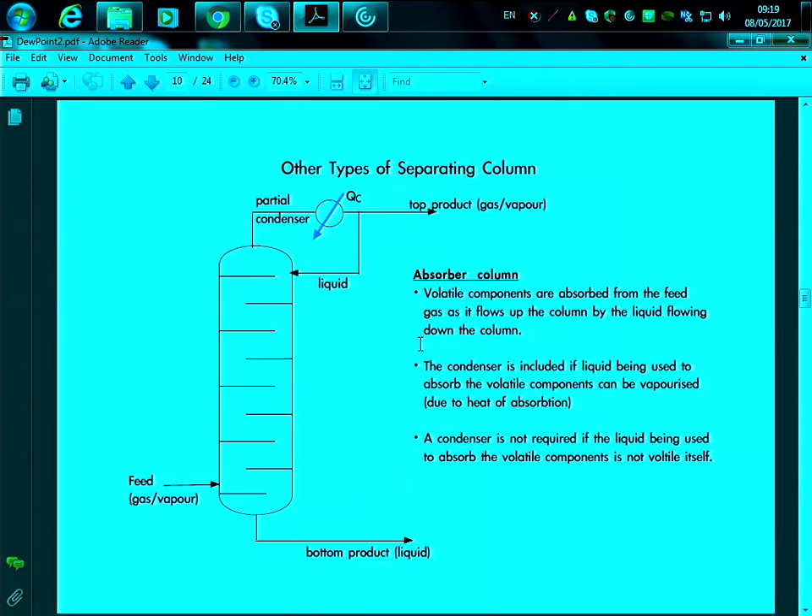Now, another type of distillation column is the one where we have a condenser, but we don't have a reboiler. And this is called an absorber column. Okay? So normally in these types of columns we have the opposite. Volatile components are absorbed from the feed gas as it flows up the column, and the liquid flows down the column. So here you can see the feed is at the bottom, and this will normally be in gas and vapor, and then the gas will go up, and then we will condense the gas and reflux the liquid down. Okay, so in these columns we can show that we have a gas and a liquid product going out of it.

Now, overall, the design of a separation column. So what does a distillation column mean? So basically it's essentially a tube where we allow gas-liquid contact. Okay, so it's a tube with a number of plates to allow gas-liquid contact, and therefore, by doing that, we allow mass transfer and heat transfer between the two streams. Normally, the diameter of the tube is determined using fluid flow characteristics. So here is going a little bit into the hydrodynamics of the distillation column, and we will not go into that detail.

There's something very important as well to consider, which is the maximum gas-liquid flow rate, and that will determine the diameter of the plate column. So what does that mean? Well, we need to use a flow rate that is high enough so that the gas basically goes up and disseminates through the liquid. However, the liquid must be in contact with the gas a reasonable time period that allows the sufficient mass and heat transfer that we want. And that will basically determine the length of the plate by itself.

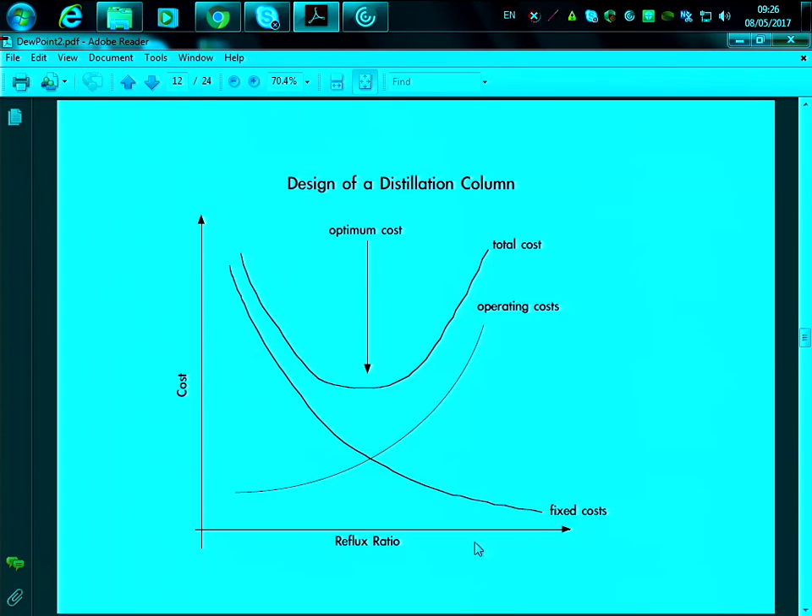So let's have a look at an example, in order to now go into the design of the distillation column, okay? So the only thing that we are going to calculate to design the distillation column is the number of plates. And why? Because if you remember last Friday when we were in HYSYS, we normally need to input in HYSYS the number of plates. Sometimes it's a parameter that is useful to estimate for simulation. So that's why we're going to concentrate on that, but not on the other characteristics that would require a lot of time to discuss and even a whole module.

So we're going to use the McCabe-Thiele model, okay, which is a type of model that is used in order to estimate the number of plates. There are different types of models, but that's one of the simplest models used for binary mixtures, and that's what we are going to learn today.

So this model will be based on a plot of the mole fraction in the vapor and liquid equilibrium. So if you remember last Friday, I said that one of the assumptions, for example, when we designed compressors, okay? So what was the assumption that we made for designing compressors? Isentropic compression, okay? So that facilitates our calculations. Here in separation for distillation columns, the assumption that is made is that in each plate, the liquid and vapor are in equilibrium, okay?

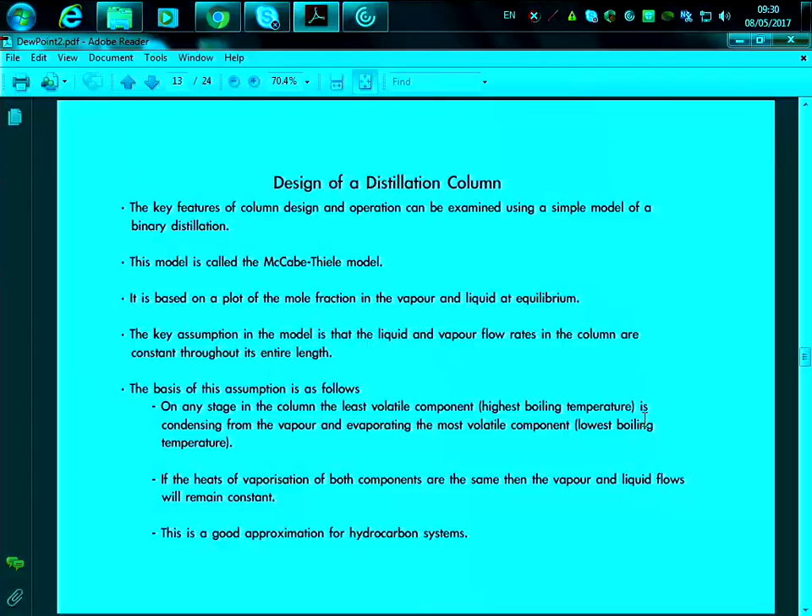So now you will see how we're going to do this approximation using this type of model. Okay, so right now look at the methodology that we're going to follow. Just check the methodology, and once you get the methodology, basically that's how it is applied to any other case. So we are going to look in this case at the benzene toluene mixture, which is at atmospheric pressure. And this is very similar to the case that you have for your assignment, where you have two compounds as well.

So here what we have is the TXY diagram of this mixture, where we have the mole fraction of benzene at different temperatures. So again, here we have the liquid vapor equilibrium curve, and then we'll have the vapor phase on this side, the liquid phase on the other side. Let's say if we had a mole fraction of benzene of 0.3, at equilibrium the liquid will be 0.3 of benzene and the vapor will be 0.5 of benzene at which temperature? 98? Around 98 degrees Celsius. Okay, so at 98 degrees Celsius, 0.3 moles of benzene in the liquid phase are in equilibrium with 0.5 moles of benzene in the vapor phase.

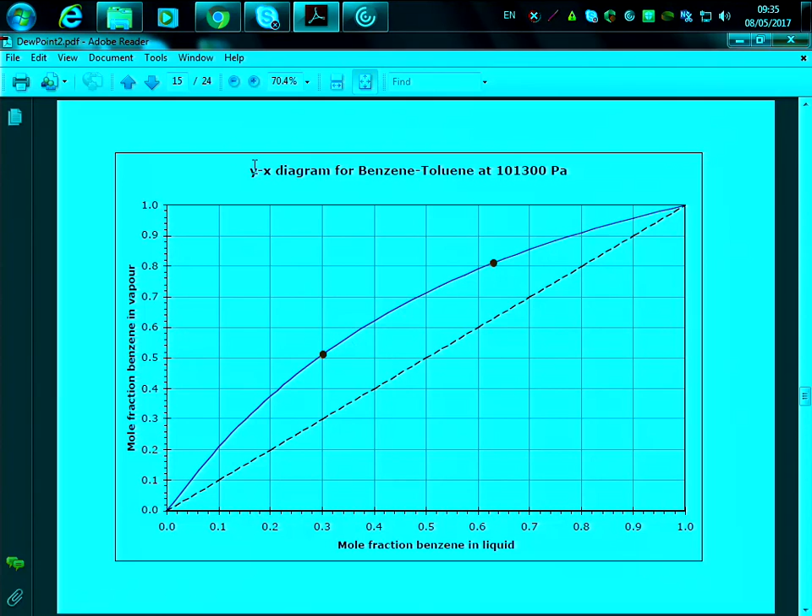Let's have a look at the example. So the example, we have a distillation column with a reboiler, okay? And in the distillation column, we have the feed.

200 moles per second, which is the flow rate of a liquid feed containing 40% benzene, 60% toluene, is to be stripped to give a toluene containing 2% mole benzene as a bottom product. Okay? So here we have the bottom product B, which is 2% mole benzene.

Will that be liquid or vapor at the bottom? Liquid. Okay, so we're taking out from the reboiler, but in your assignment, you're taking up from the top of the reboiler, the vapor. But in this case, we're taking from the bottom of the reboiler, so therefore we're taking up the liquid fraction.

So we have the bottom product that has to be 2% benzene, and the top product D, 56% mole benzene. So the vapor leaving the reboiler is in equilibrium with the liquid in the reboiler. As equilibrium condition is set, we can read the temperature from the TXY diagram too. Okay? So this liquid at 2% is in equilibrium with the vapor.

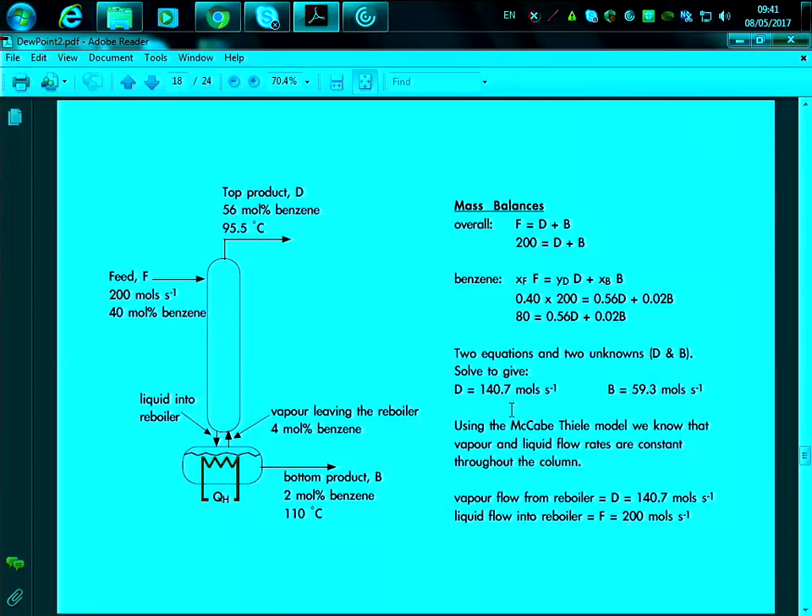So we have now used this value in order to estimate the number of plates. Imagine that you want this flow rate, and now you need to determine the number of plates that you need to get this flow rate on the column. So we have the liquid flow into the reboiler and the vapor flow from the reboiler.

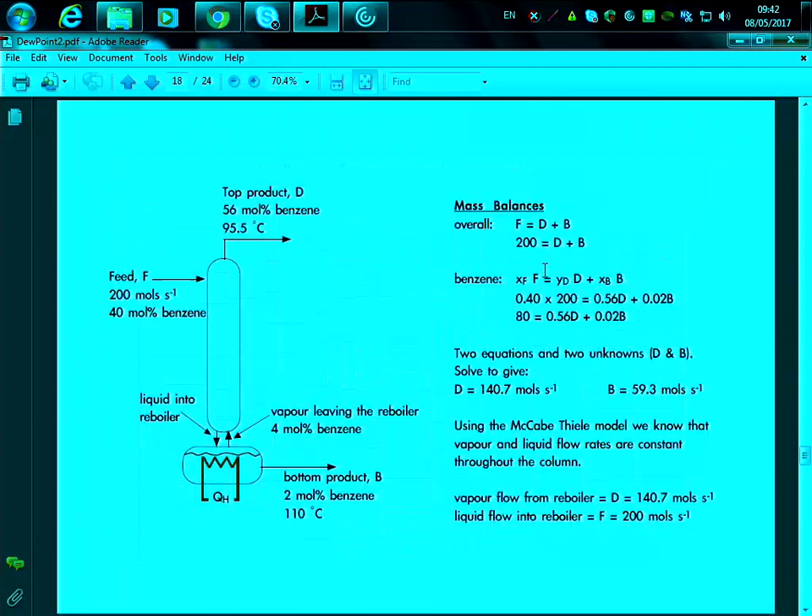So basically we will follow the procedure that you have here. The first thing that we need to do is to plot the feed and top product composition as a point, XF and YD. So if we look at this, the XF is basically the composition at the feed.

The composition at the feed is 40% benzene. If we are feeding 40% benzene in the liquid, then from the equilibrium curve, the TXY diagram, we get this amount of mole fraction in the vapor. So therefore we can plot this value.

Now, for the bottom product, we basically want 0.02 of benzene, and then we have 0.04 on the vapor, so we have this value as well. So we have a value for the reboiler and for the feed, and using these two values we can draw geometrically a straight line, and that's basically what we want to get, from the feed that we have in the distillation column up to this part in the reboiler.

So we want to go down from 0.4 benzene in the reboiler to 0.02 benzene to take that out. Basically throughout the distillation column, the mixture will be fed at the top, and we'll need to go through heat and mass transfer to achieve this composition at the exit. So something must occur during the distillation column to bring the feed from here to there.

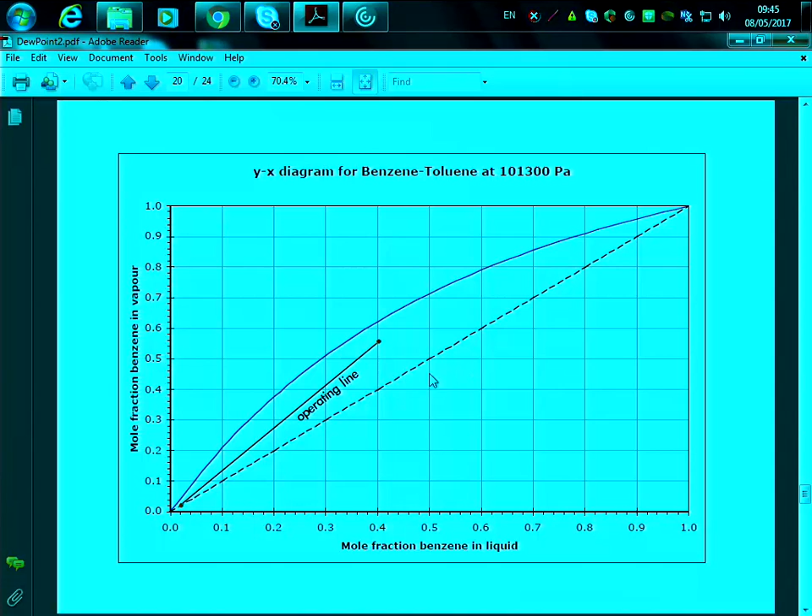Now, what we're going to do is represent the liquid vapor mixing on each stage within the column by steps drawn on the XY diagram between the operating line and the equilibrium curve. So throughout this operating line, we will have several stages by which the heat and mass transfer occurs, and those are expressed as vertical lines and horizontal lines.

This is really a geometric approximation because we take a ruler and draw vertical lines, which represent the change in vapor composition as it flows through a stage, and horizontal lines, which represent the change in liquid composition as it flows through a stage. The number of steps is equal to the number of stages required for the separation.

So we will start in the initial operation, and we'll basically draw vertical lines up to the XY diagram, and then a horizontal line, another vertical line, horizontal line.

And we'll go through the whole stages like that, up to the point where we achieve the basically feed composition. You can do the same from here to there. So you can start here,

draw a horizontal line, vertical line, horizontal line, vertical line. Each one will represent the number of stages. So after that, we will just count 1, 2, 3, 4, 5, 6, 7, 8. So we have 8 horizontal lines. Therefore, this column will require 8 stages to achieve that composition.

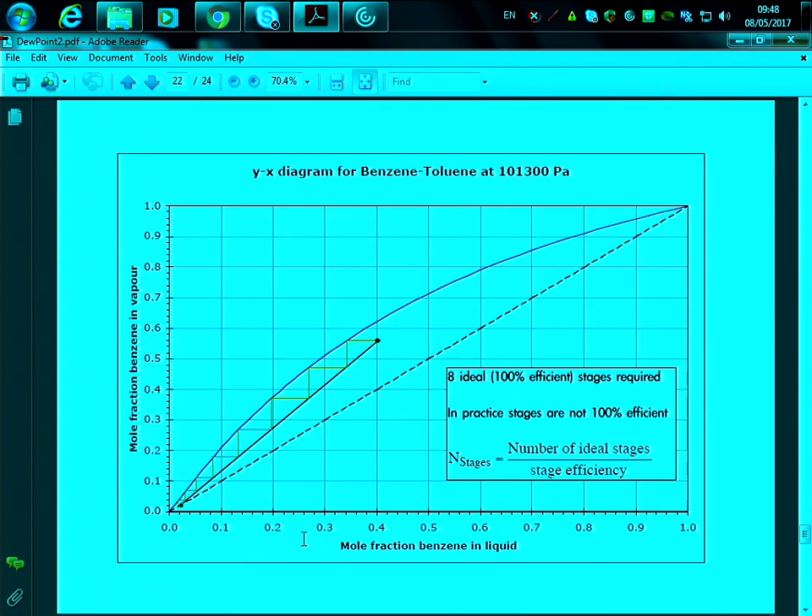So that's the way that we calculate the number of plates manually. And that's another example where you are given the XY diagram already, and you have to calculate the number of plates for this. So calculate molar flow rates of the product, calculate the number of ideal stages. Molar flow rate will be through a mass balance that we have seen already how to do it, and the number of stages through the McCabe-Thiele method, which is taking this plot and calculating the number of stages.

So as far as distillation column concerns, that's what we're going to learn. And now what I'm going to do is go through the simulation. So we'll take a 5 minute break, and then after this I'll open HYSYS.

And I mean, I did it again. I don't know what happened on Friday. Something, I mean, always with these things, but I did it again on the weekend and it converged. Or I'm going to try it now. I don't know what is going to happen. Hopefully it will converge, okay? Anyway, we'll take 5 minutes break, and then I'll show you we'll do the HYSYS again together.

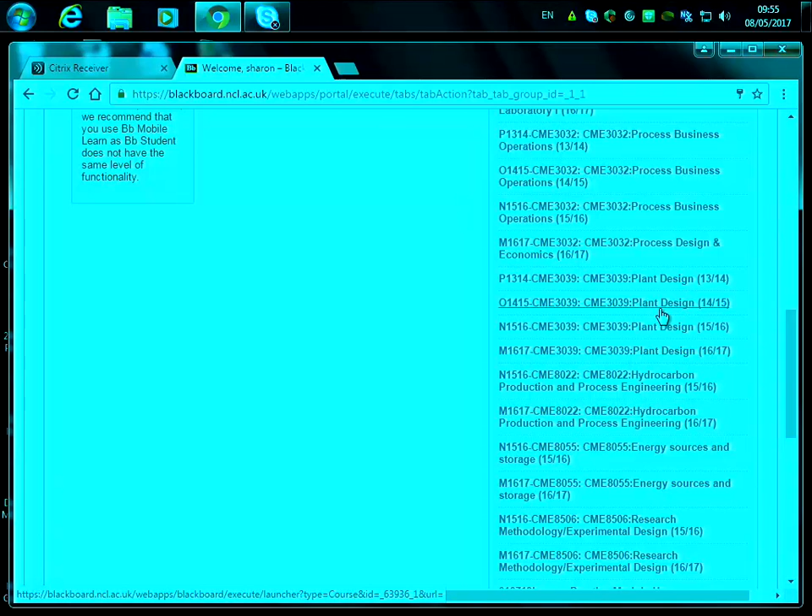Is it been an updated version? I think there is an updated version. Is it on Blackboard? 'Cause I'd look at Blackboard. Yes. Let me, I'm here in Blackboard. Which you see for...

Yeah, so yeah, I've got an old one. Yes. And then can you scroll down to the process flow diagram? Yeah, valves, so just calculate the work in the valve. Yes. Cheers.

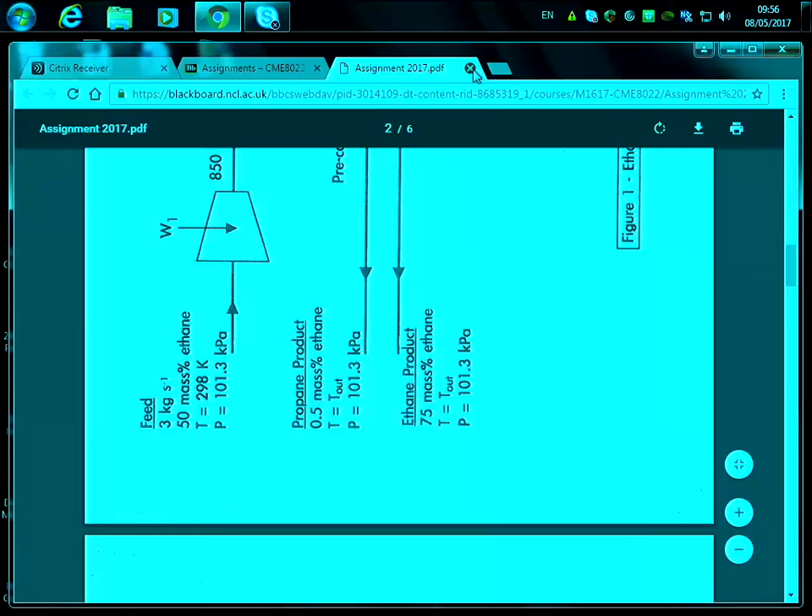You know, is the cluster of this building the only one with it on? Or is it on... No, you can go through RAS. My computer, and you don't have RAS. I've got it, but my computer just runs so slowly, it doesn't work properly. So any cluster computer, you can go to RAS and work through it. Yes, but then it's better to use the cluster because you go directly to the software, and RAS sometimes has problems. Can I access that cluster even though I'm... yes, yes. I think your smartphone should open that cluster. Yes. Okay. Cheers.

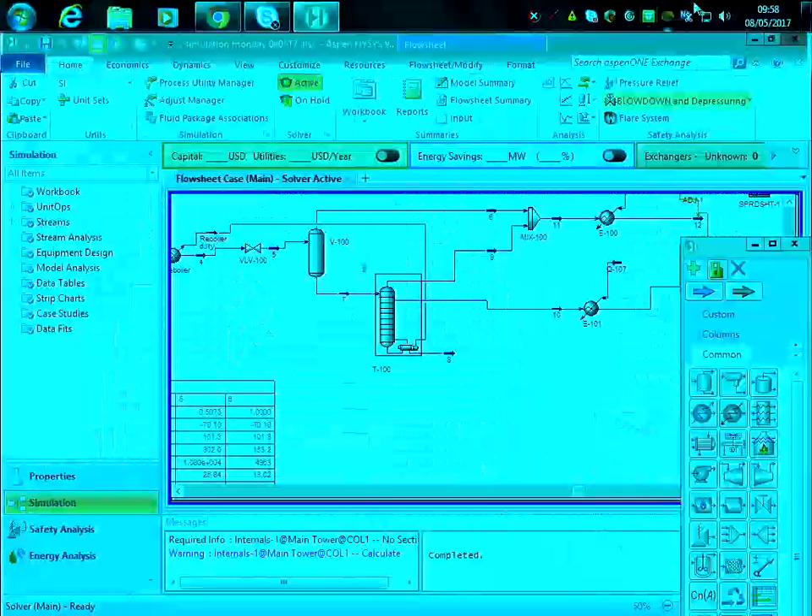Right. So, where do you want to start from? Should we do the distillation column again? Don't tell me that. That was the problem last time. Okay. We'll see what happens, right?

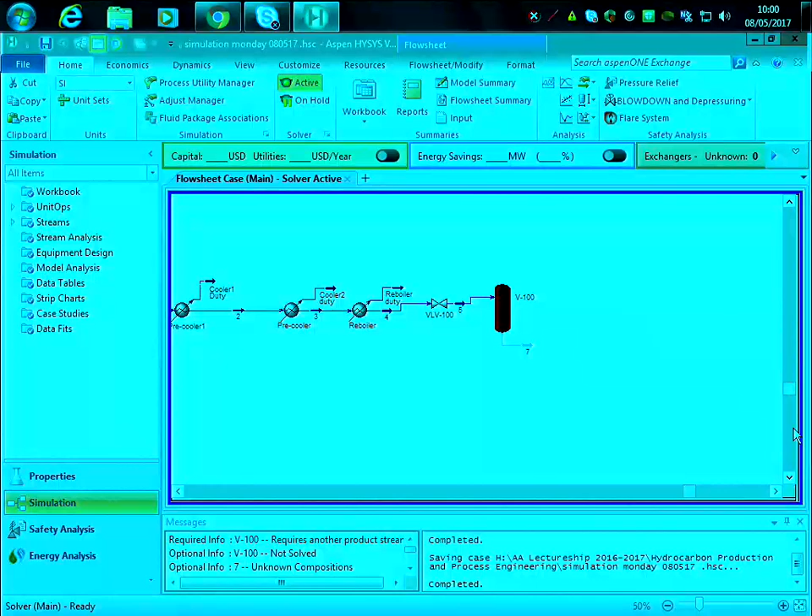Okay, so you'll need to take notes so you can later on simulate that by yourself. What happened? Where is my... What happened?

Right, so we have just finished the valve, and we'll go to the separator. Okay, it's not allowing me to. In the separator, we basically need only to define the streams, and that's it. That's the only thing that is needed there.

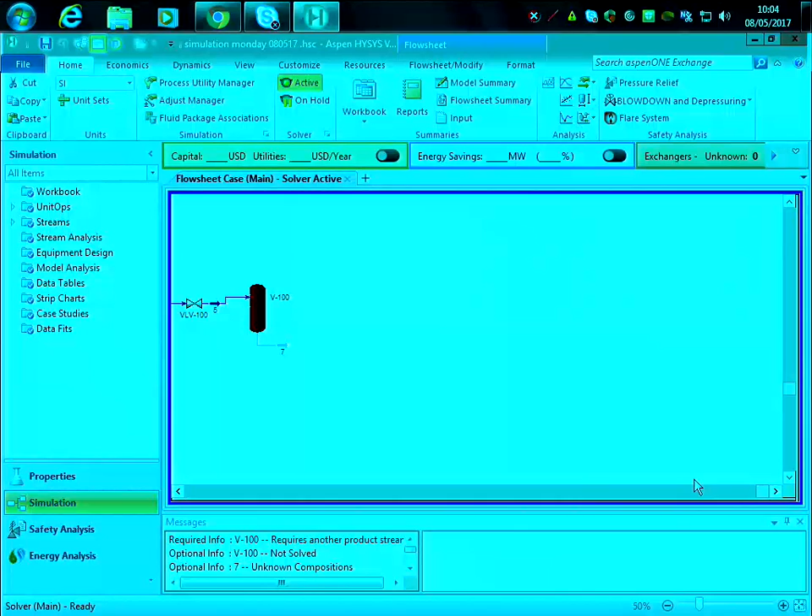Okay, so we go into the separator, and we'll define vapor outlet number 8. So I'm basically just writing up the stream flow numbers, right? So this is where the vapor will go, and that's the liquid, right? So after that,

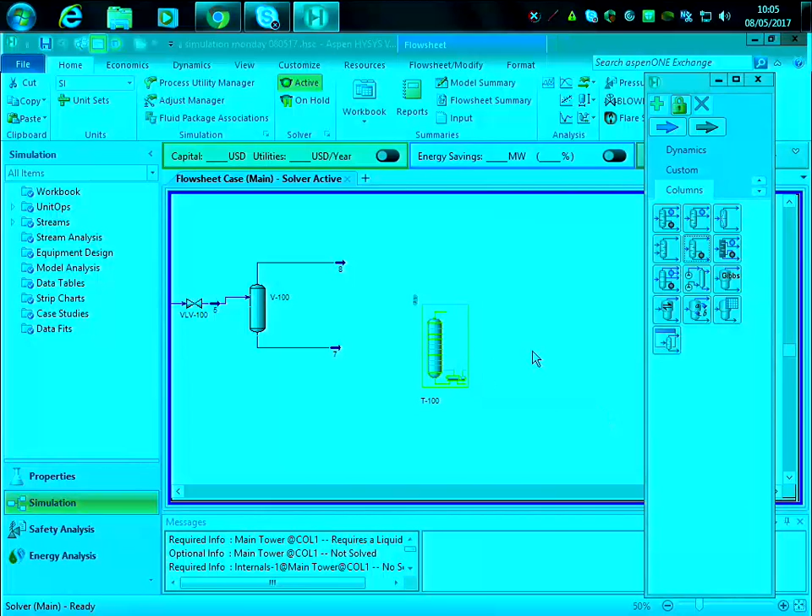I click F4 if I lose the palette, and then I will go into columns, and I select what is called in HYSYS reboiled absorber column, but basically it has one reboiler and no condensation part, which is what we want, right? So the top stage inlet is going to be 7, the liquid fraction going out of the separator. The overhead vapor outlet, let's call this 8, and the

So we need to define a stream that is the vapor that we're going to take out from the reboiler. So let's call that 11. Okay? So this will be a vapor fraction, and that will be retrieved from the reboiler. So from the reboiler, we won't take out the liquid, as is shown here. We will take out the vapor, and therefore this is the reason why we need to specify an additional stream here.

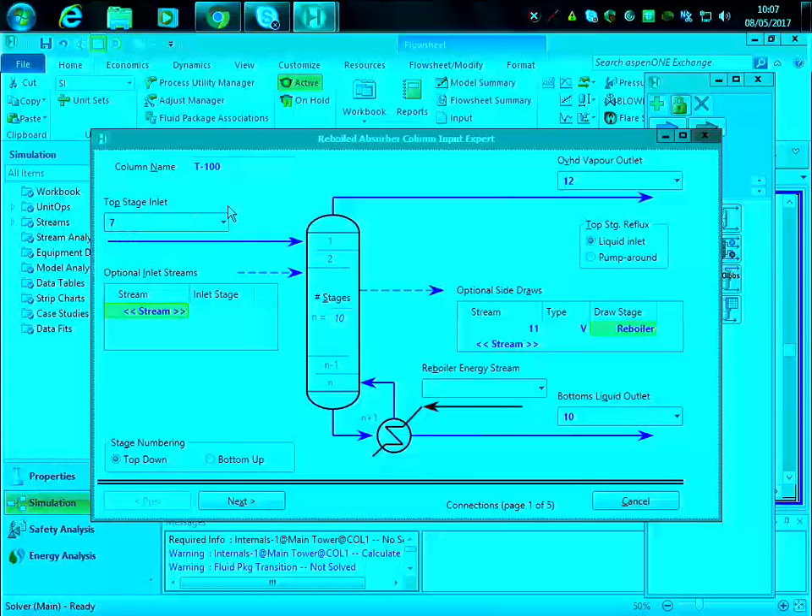Okay. We don't have any other inlet stream, just the top stage inlet. The column name, let's leave it like that, and that's it. Number of plates, we said that we were going to start with 5, but once you do the theoretical calculation, then you'll be able to input something that is closer to that.

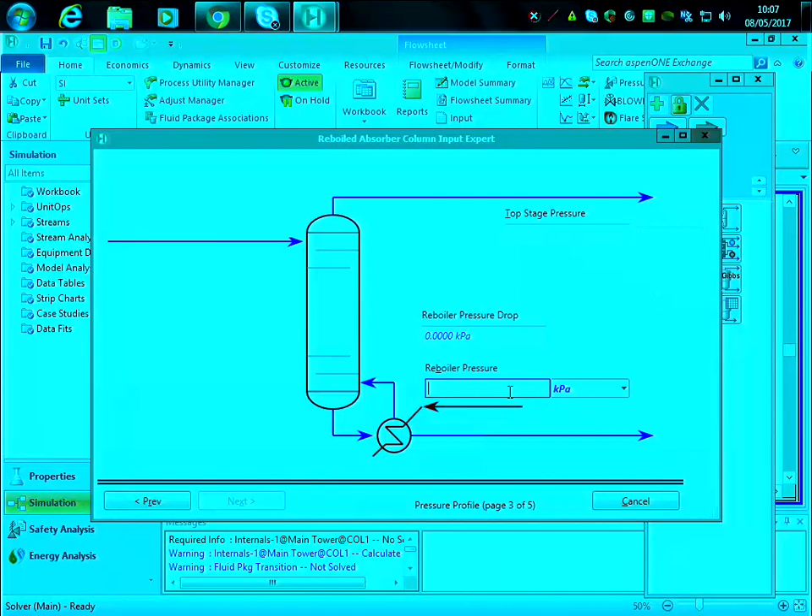So let's click next. Once we click next, we don't do anything else. We want once-through, a regular HYSYS reboiler, right? So we click next here, and here we need to specify the pressure. So this is 101.3 kilopascal. Reboiler pressure is the same, and pressure drop 0. So we're not taking into account any pressure drop through the system.

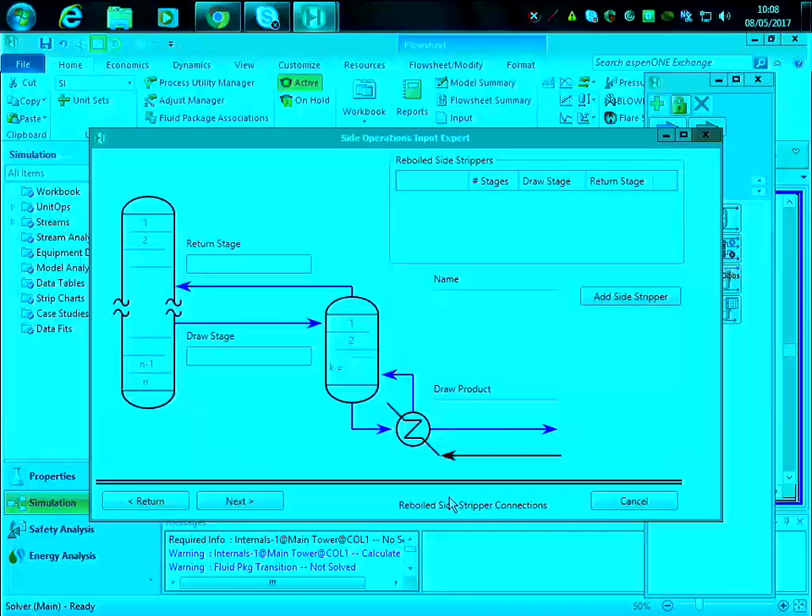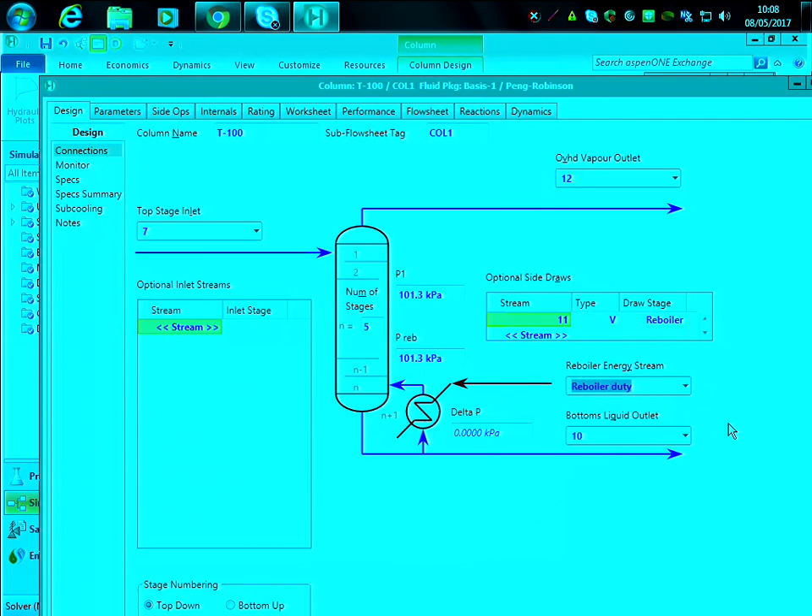So we continue next. Do we have temperature estimates for these ones? We don't have that information, so therefore we click next. Boil-up ratio, we don't have any boil-up ratio, so we could click on next. Okay? Is that all right? Reboiler energy stream, we said that we were going to connect it to the reboiler duty before. All right? So then we go to monitor.

And then in monitor, we'll have to check the degrees of freedom. The degrees of freedom for the model to converge has to be 0. At the moment, we have overspecified the system. So we take out one of them. This has come to 0, but actually we don't have this rate, so we take out this one. So now we need one variable to specify, because we have a degrees of freedom of 1, so the model won't converge. So I'm going to add a spec.

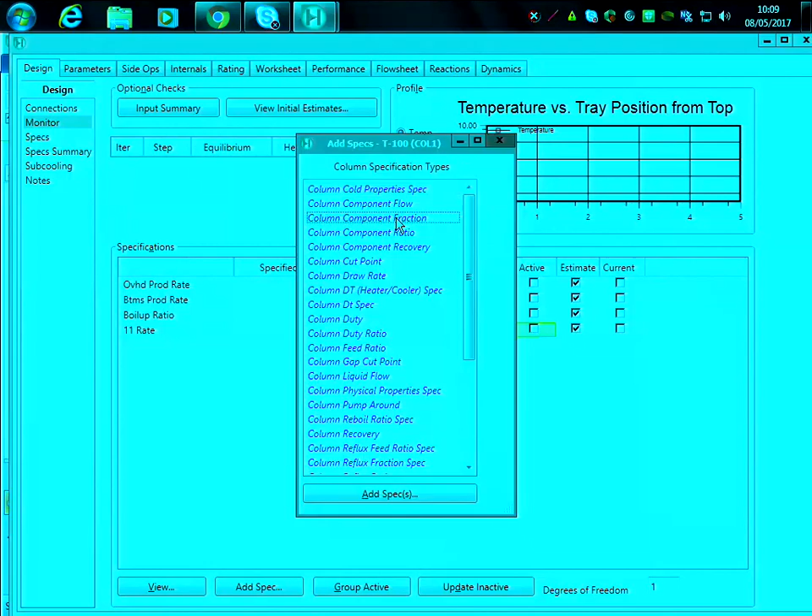And what are we going to add? We're going to add the component fraction, because we have the fraction of propane going out of the reboiler, so therefore we can specify that. So, component fraction, target type, stream. You need to click here, stream. So which stream are we going to take out? What is the stream that is going out from the reboiler? 10?

Is it 11? 11 or 10? It's from the reboiler. Remember that it's not the liquid fraction, it's the vapor. So it's 10? No, 11. 11?

Okay? Which component are we going to define, ethane or propane? So we can define propane in here. And we are going to define the mass fraction because that's what we have in the assignment. So what is the mass fraction that we have of propane after the reboiler? 0.995, right? Because we have 0.5% mass ethane.

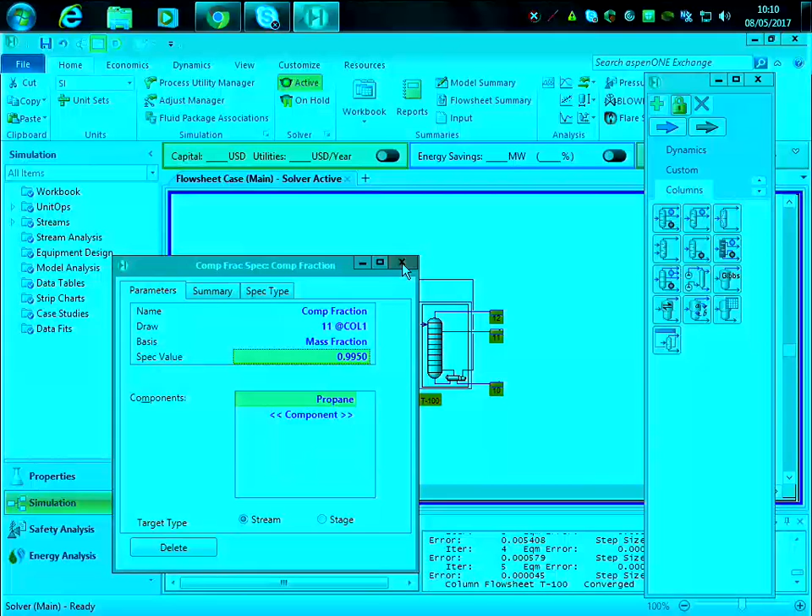We click enter and we close. And that's it, it has converged. Right? So we can check that here and it's green. Normally here it will show green if it has converged, red if an inconsistency has happened, and if you get yellow then check your degrees of freedom.

Or in my case, I don't know what happened to the program on Friday. It started to play a little bit funny, so sometimes if things went completely wrong, delete everything and start up to the point where things were converging. Okay? So that's it. We only need to specify the component fraction and then the system has converged.

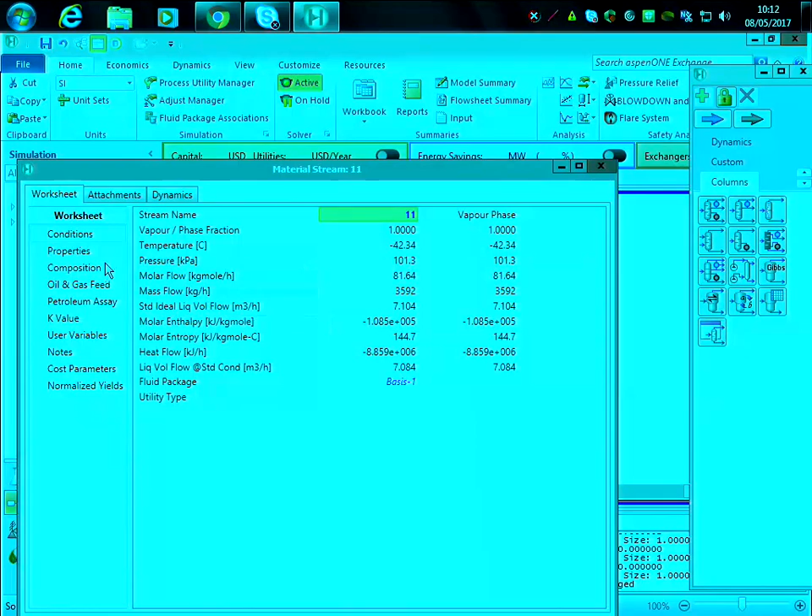Close. Right, so after the distillation column, we have 11 and 12, right? So let's check. 11, composition, 0.992 propane, okay, which is close to 0.995 that we wanted. 12, double click, check composition, 0.76 of ethane, which is close to 0.75 of ethane that we wanted, right?

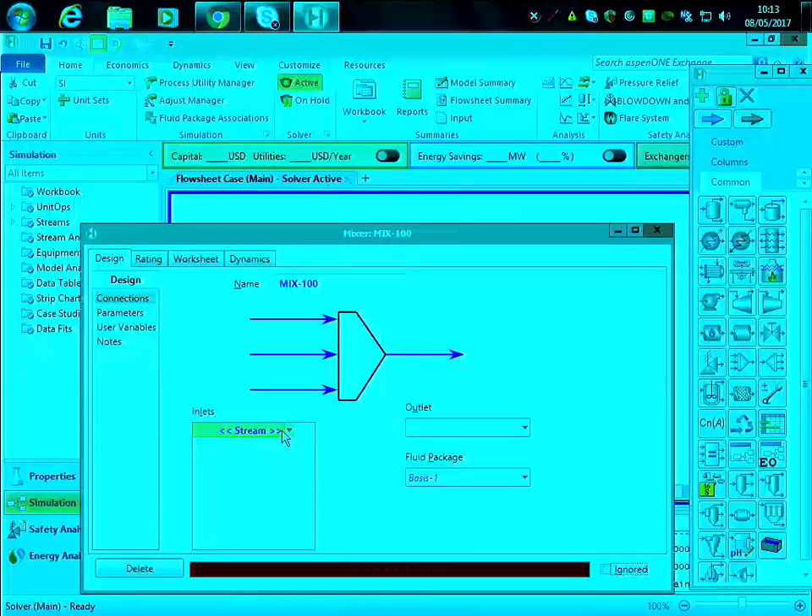So now we need to join the vapor where we have ethane coming from the separator to the distillation column. So we said that to do that we simply use a mixer. I think the mixer is very easy. You just need to define the flows. So what goes in the mixer? So the inlets, we have 8 and 12, right? 8 and 12, where we have basically the ethane going. And then the outlet, we'll need to define the outlet, so we'll define it as 13. Okay? And then it converges.

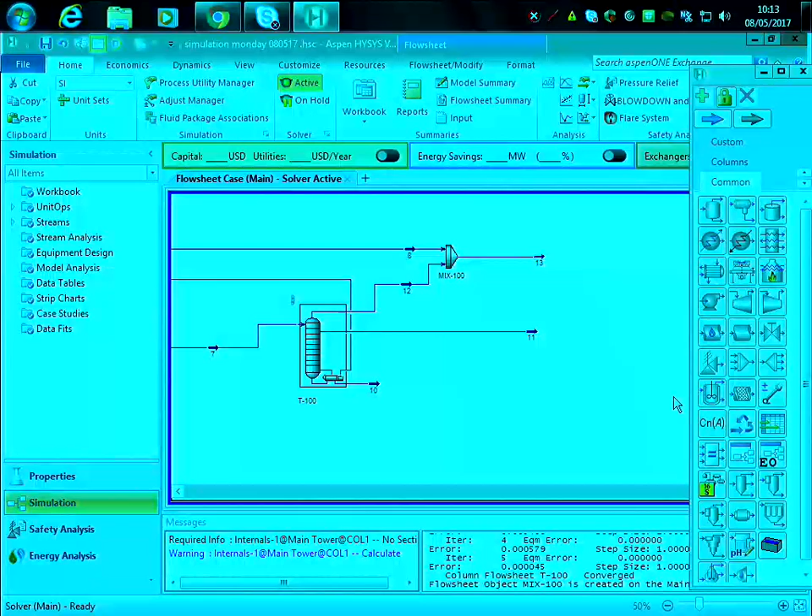So then we have the ethane and we have the propane fractions here, right? So the only thing that is missing is the pre-cooler, which in this case will be heating these flows, right? It will be cooling down the inlet flow, but it will be heating the outlet flows, right? So I need to link these 13 and 11 with this pre-cooler, right? So what I'm going to do first is define the function that is happening in each one of these flows. I'm going to leave them separate because if I mix them, then there's no point of everything that we've done so far. So we'll leave them separate and we'll define a heater in each one because that's the function that is happening.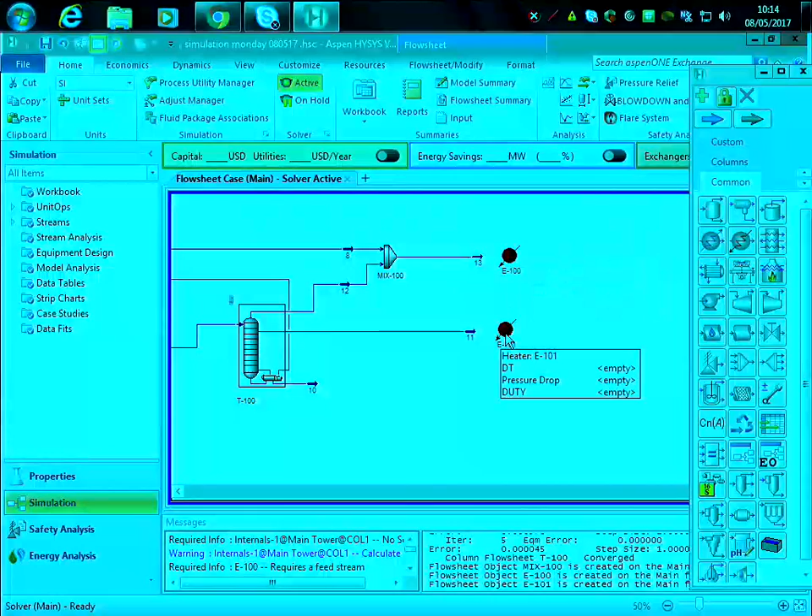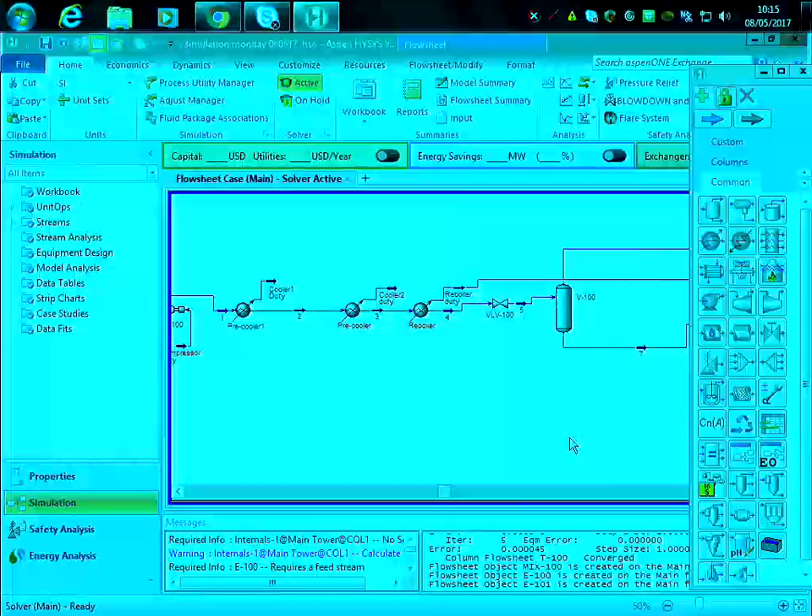So I think for this stream it's cooling it for the 13 and 11. 13 and 11 is heating up. What is cooling is the feed. So here we define a cooler because it's cooling the feed. If it's cooling the feed, it's heating up the outlet. It's a heat transfer. But with high temperature, how can it cool the pre-cooler down? Because the temperatures in here are, I mean, this is a gas phase process, so really it's a high temperature, but the feed is a little bit higher than that temperature. Okay? So the feed comes at an even higher temperature than this one.

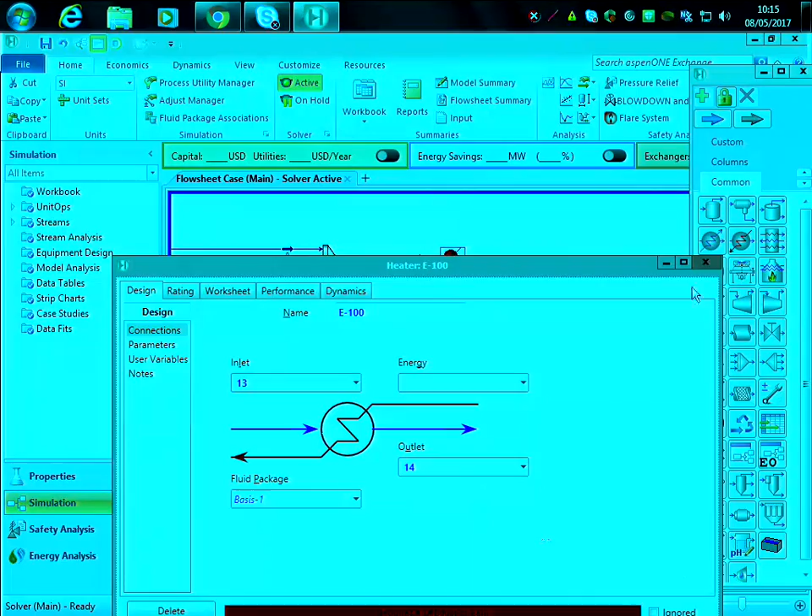So basically, what we're going to do is join. So the inlet in here will be 13, and the outlet in here will be 14, okay? And then let's join the other. Inlet 11 and outlet 15.

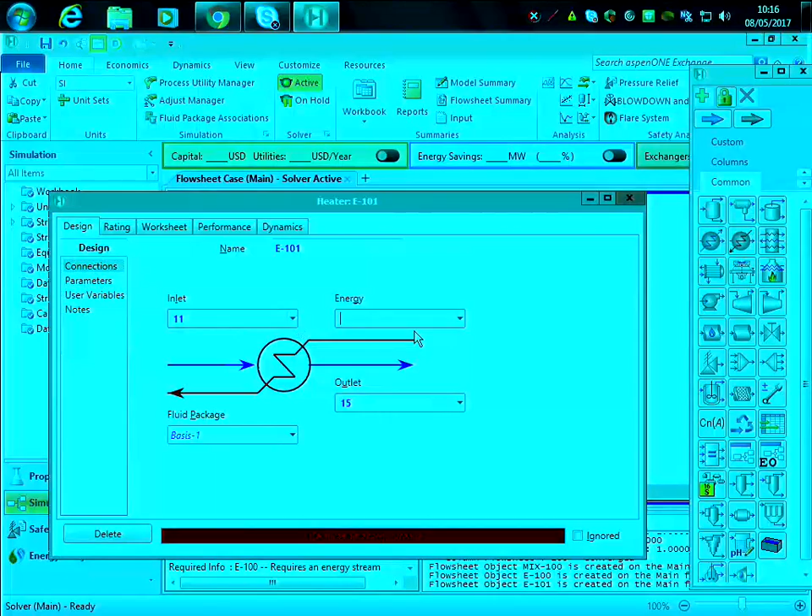Now it hasn't converged because normally in heat exchangers I need to define the duty, and by that I mean the heat flow or the temperature, and I haven't defined any of them, but I have the duty from here. So the heat flow in here is 2.82 times 10 to the 6 kilojoules per hour. So initially I'm just going to divide it in two parts, or just give a number. I'm going to give an energy here of 50. On delta P, is there a change in pressure in the heat exchanger? No, we're not defining a change in pressure, okay?

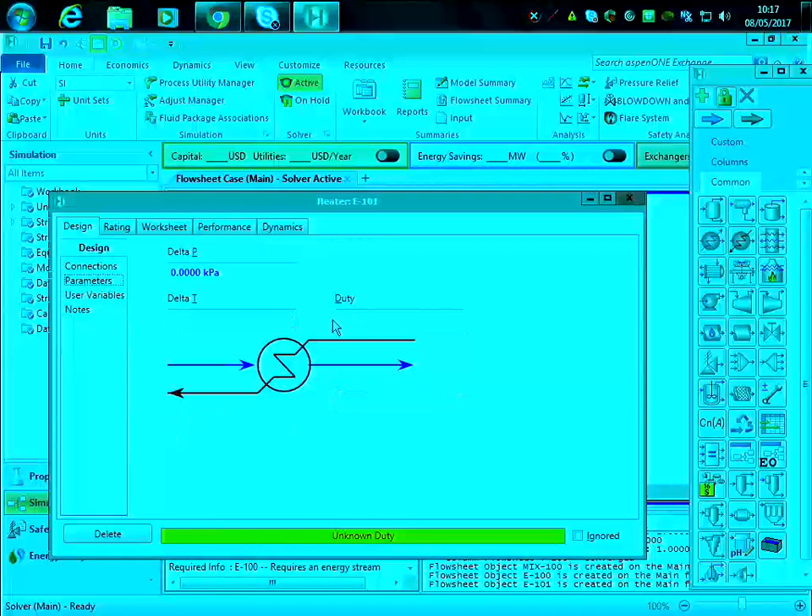So, okay, over here. What is the number that I gave? Heat 107. I think I need to label it. I'm just labeling it. Q106. That's just a random label that I'm giving. You can give any name that you wish.

Okay. So I need to click what is the inlet flow, the outlet flow, and give a name to that. It could be energy 1, whatever you want to call it. I'm calling it Q106 in this case. And then I'm just defining a duty, which is very small in this case, okay? But it's within the range. It doesn't matter. Just define a duty for the fact of converging it right now.

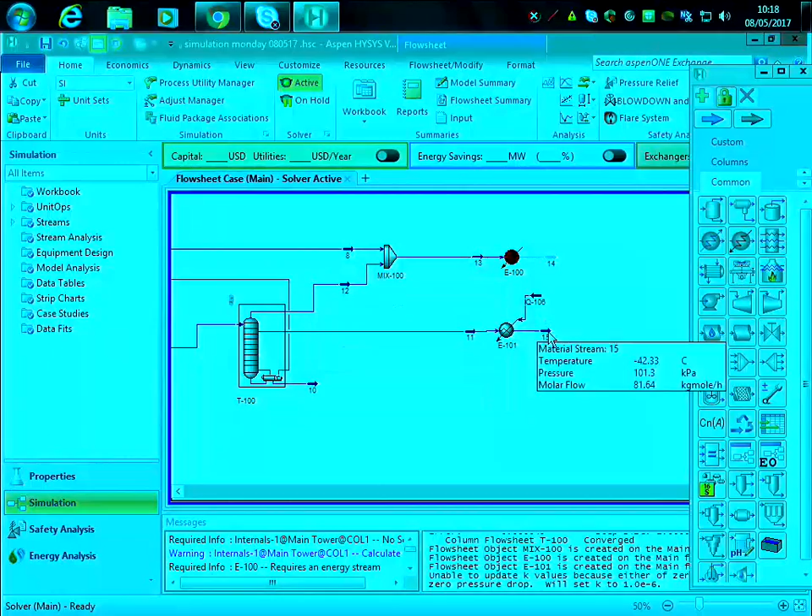Those were all my trials. Okay? So this has converged, but obviously I know that this is not correct. Now, I have to do the same in here. So, which number, a name I gave? 106. So Q dash 107.

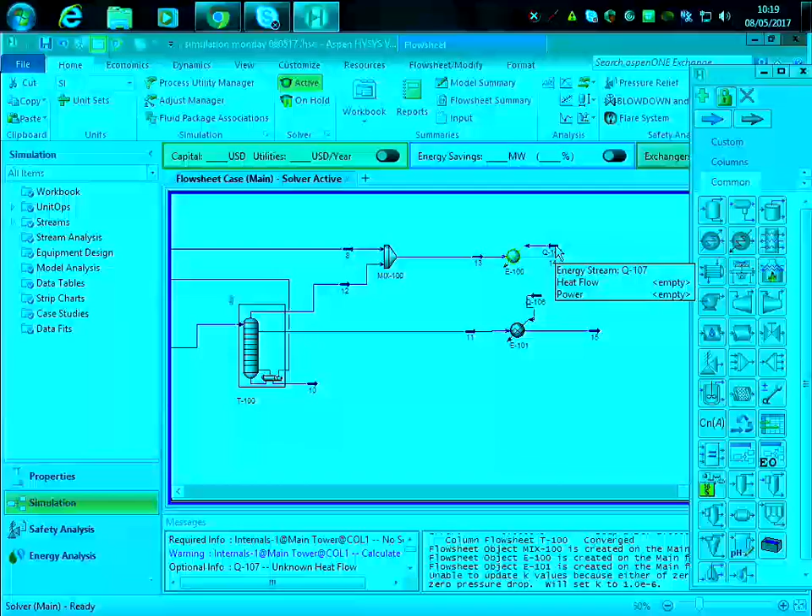Or no delta P. I need to define if there is any pressure drop. There's no pressure drop. And then the next thing will be to define the duty. I'm not going to define the duty. Should I define the duty? I think the duty will be defined later on. So I'll leave it like that right now. Well, let's define the duty. 50. Okay, it converges.

So both have converged so far, but I know that the duties are not all right. So now I need to correct the duty because that's not fine. So what is the assignment telling us? The assignment is telling us that the temperature of 14 and 15, will they be the same or different? They must be the same, right? So right now the temperature of 14 is minus 68 and 15 minus 42 degrees Celsius, so they are not the same. We need to make them the same.

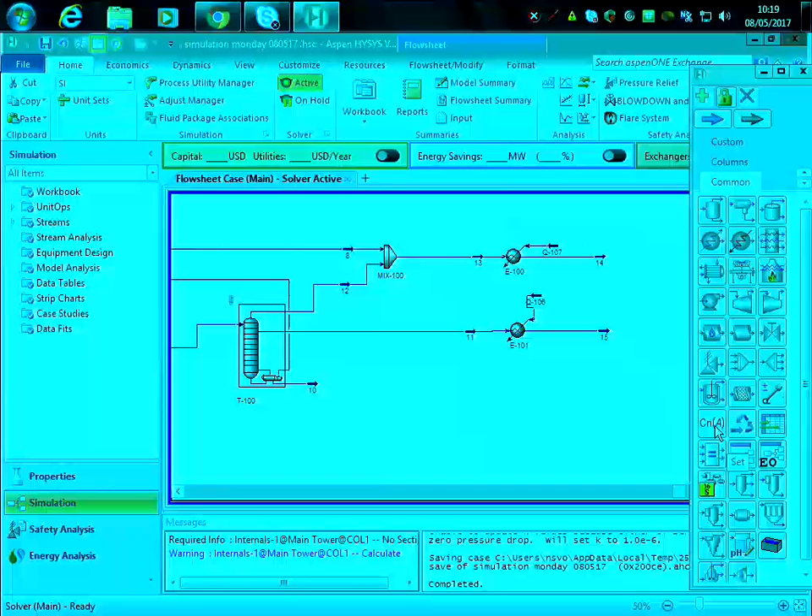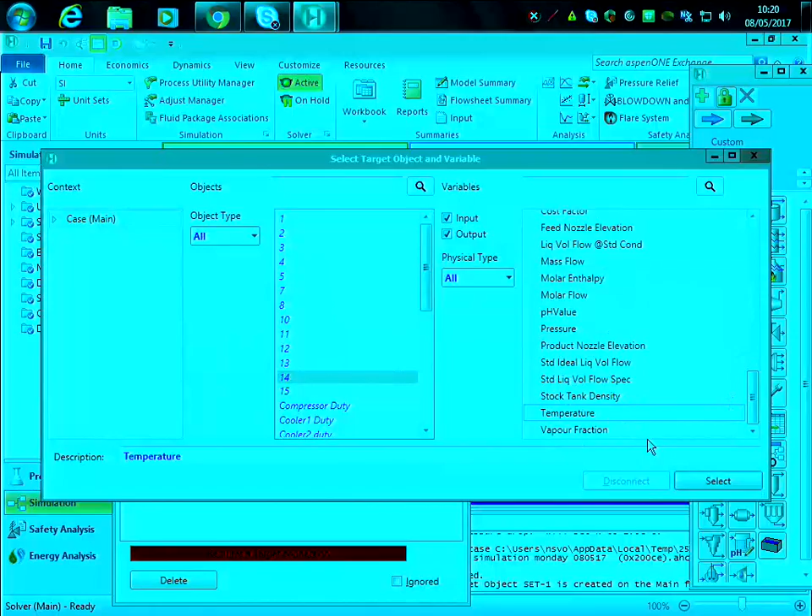So to make them the same, I'm going to use this Cn parenthesis A, which is the set function. And I'm going to set for these two flows to be the same. Okay? So therefore I'm going to select variable 14, and then here I select the temperature, select. So I want the temperature of the stream 14 to be the same as the stream 15.

Okay, right. Now they say an inconsistency error has happened because you have over-specified this problem. You cannot define the heat flux and tell us which temperature it is. I mean, you're telling me that you need to use this heat flux and achieve this temperature, and it's impossible. We need to be able to change the heat flux. Okay, so I take out the heat flux of this stream, at least of one of the streams.

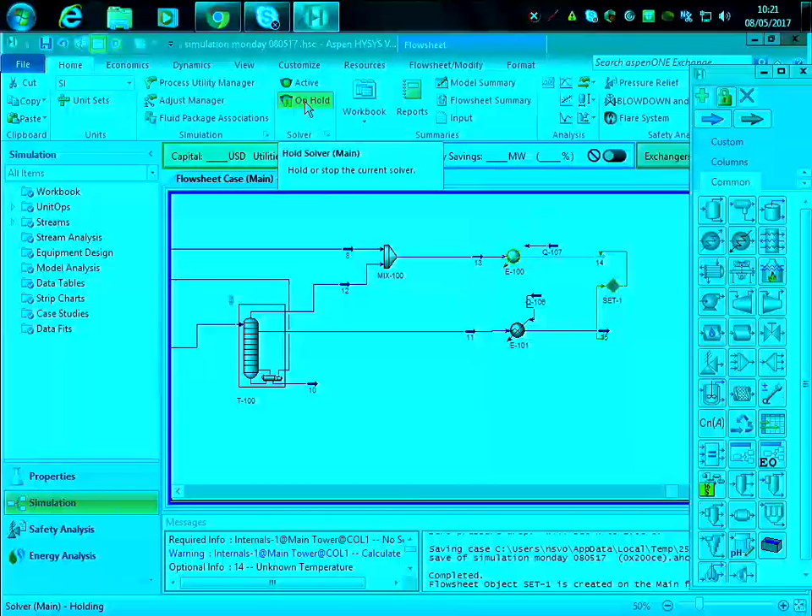Now, check, because as soon as something happens, the system will go automatically on hold. It won't be active anymore. Okay, so as soon as you have an inconsistency error, then it stops the simulation immediately because it cannot run basically with the error that you have put. So let's see if I have deleted that, if this now works. So I'm going to click on active. And then that's it. Okay, everything is blue and everything is happy.

So now the temperature of this is minus 42.33 degrees Celsius, and the temperature of that flow is minus 42.3 degrees Celsius. What has happened is that I've taken out this heat flux, so the operation has been able to change that heat flux to meet the temperature of the other one. That heat flux is still defined to 50, okay? So as long as you are able to change one, then they play with that heat exchanger to meet the temperature on the other one, okay?

So now I've met the condition that both temperatures are the same, but I still have the problem that this heat flux plus this heat flux has to be the same as the pre-cooler. And those, if you add them up, they're not the same so far, okay? So this is 50, and this is 2.76 times 10 to the 5. So that won't add to 1.86 times 10 to the 6, I think. So I need to set up this system so that these two are the same heat flux as the heat flux used in the pre-cooler to link them up.

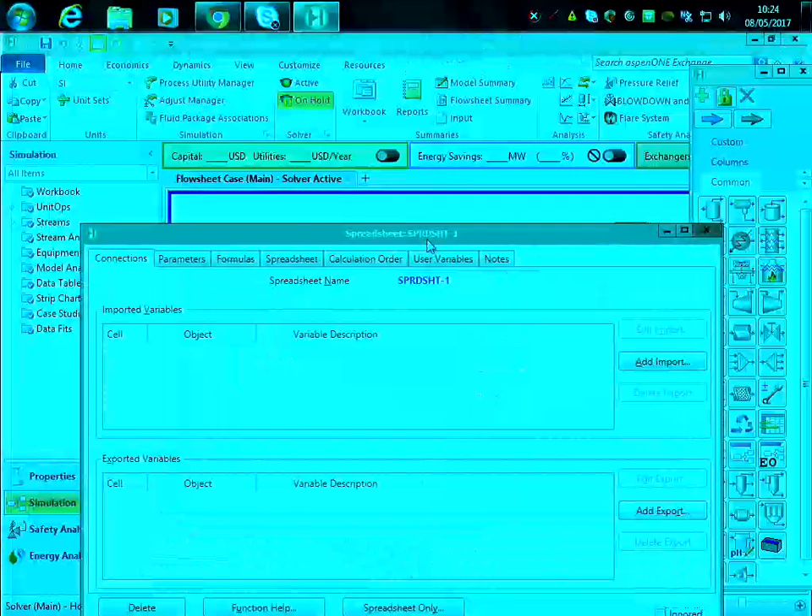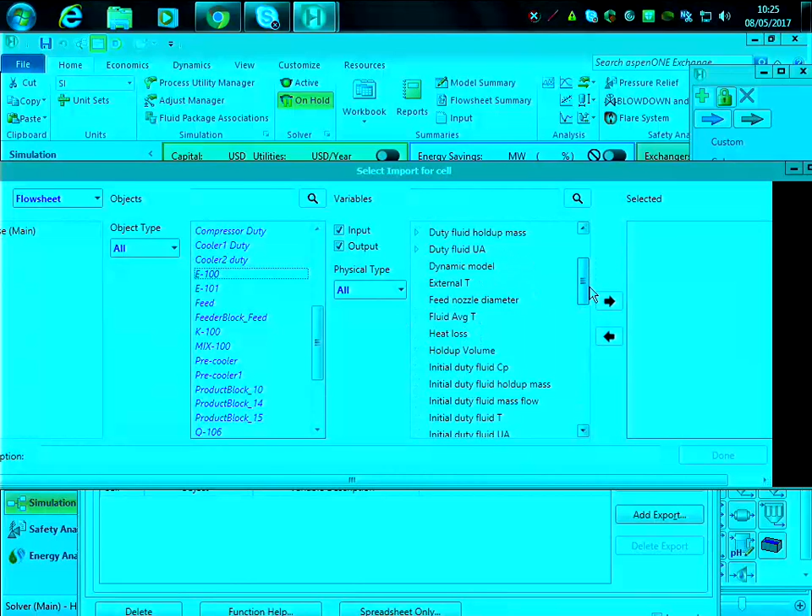So go to the spreadsheet. Now, in the spreadsheet, I need to add the variables that I want to work with. Okay? So the variables that I want to work with are E... which E is it? E100, E101. So E100, and then within E100, what I want to change, where is it? The duty. It should be heat flow, but I'm not sure why it shows as duty here. Well, I'll write duty. And E101, duty. Okay?

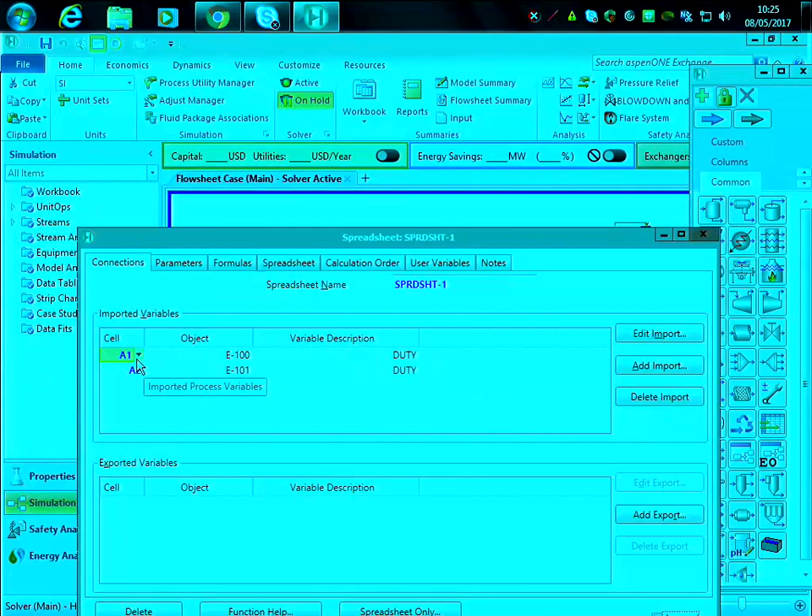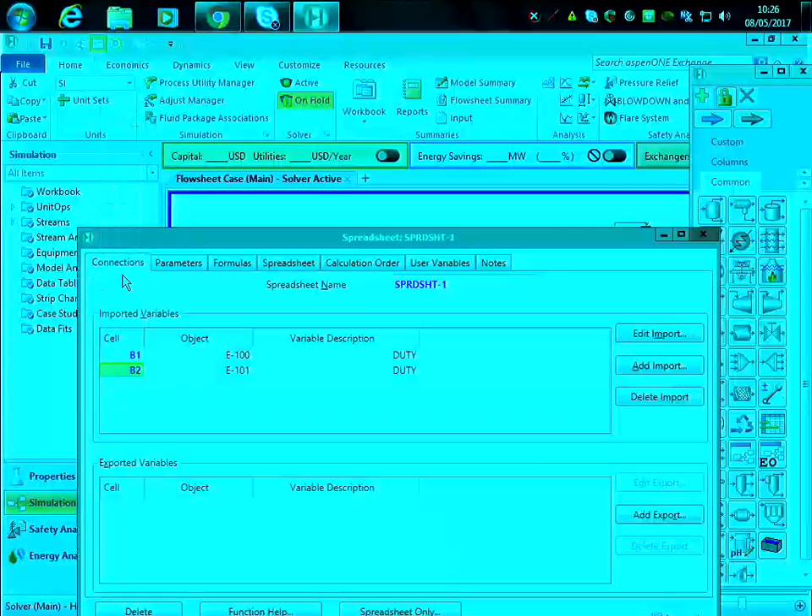So now I have defined the duty of E100 and E101. Where is the spreadsheet? Here is the spreadsheet. So right now what I have said is put in cell A1 the duty of E100 and write down in cell A2 the duty of E101. Do you remember that I specified 50? And this was calculated, right? So it's basically doing that. So I can change that to B1 if I want. B1 and B2. And then it appears in B1 and B2.

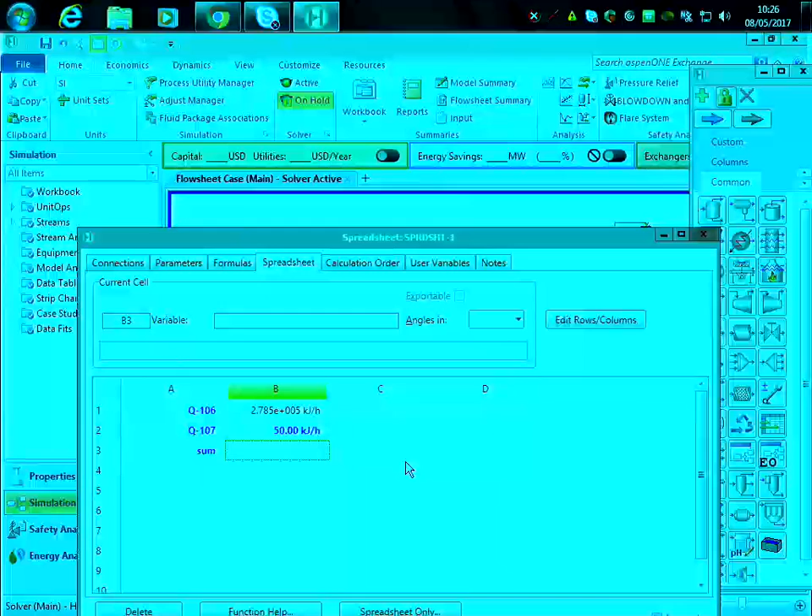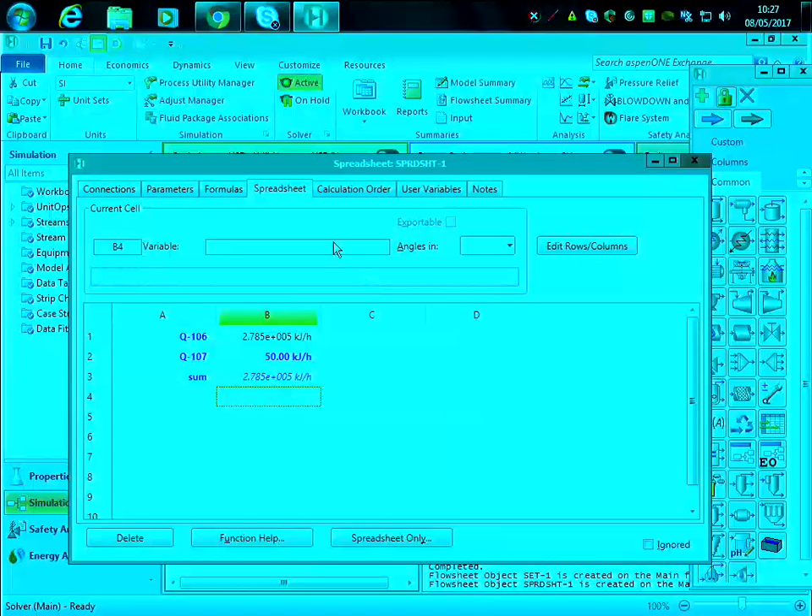So I'm just adding some labels. And then that's the sum. So here I want B3 to be the sum of B1 plus B2. Right? Because they're in lower case. I don't think it should affect. Perhaps because I have it on hold, so it's not running anything. Okay, so I'll leave it like that. Let's see if I click on active. Okay, so that's an energy variable. I'll put it on hold again.

So therefore cell B3 is B1 plus B2. That's the result, and that's the energy. The parameter that I'm estimating is B3, and the connections that I made are the duty of each one of those, right? So I've input the formula that I want, and I've defined a new variable which is B3 basically. Then I close this spreadsheet. So now I'm going to use another icon to make the adjustment, and that's called adjust. How do you call this tool? The spanner, yes. So you'll adjust the whole system with the spanner.

Right, so what am I going to adjust? What I'm going to adjust is basically the temperature at the outlet. The temperatures of 14 and 15 are the same because of this set. Now I'm going to change the heat flow of these two by changing the temperature at the outlet. So the temperature is what can be changed. We don't have a defined temperature, and we need to find the temperature that makes the system converge. So I'm going to double click on adjust.

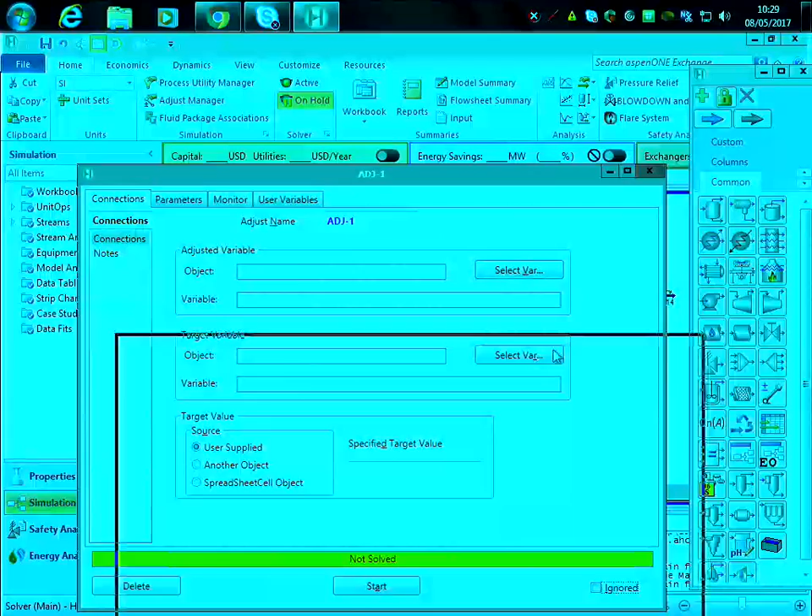So I can select either the temperature of 14 or 15 because they are the same. So I'm going to select the variable and then stream 14. I click temperature, select. So I'm going to adjust the temperature. What will be the target variable, what should I change it to meet? So now I'm going to the spreadsheet and I'm going to select B3, which is the variable that I have defined. So what do I want B3 to converge to? What value should we supply here? 2.86 exponential 6. Oh, you have good memory. So that's the value that I want to check, okay?

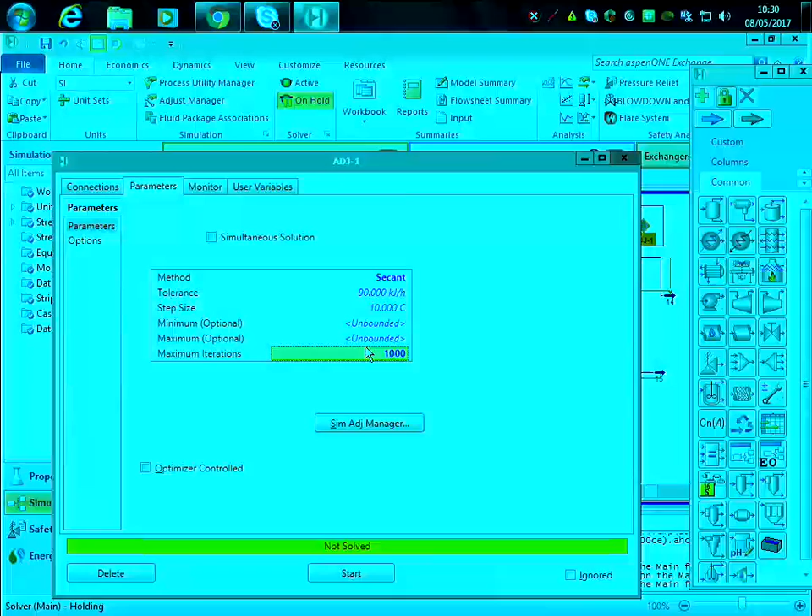Now I'll go to parameters. And here in parameters, you don't need to change anything. It's just the number of iterations, so how many times it's going to run the program in order to get that value. Normally the setup says 10, but you can change it to 1000 to give it enough iterations if needed to get that value, okay? So once you have that, I'll click active and hopefully it will work. Now everybody cross their fingers.

Oh no. Oh yes, I know what happened. Close it. Something has happened here, and that's that I'm specifying this heat flux, so I'm over-specifying the system. So now I need to delete the heat flux that I just guessed, basically invented. Right? So now I don't have this heat flux, and I don't have that heat flux. And I have these parameters, so then I click active. And it should run, but it doesn't. So let's see. I'm going to take out this adjust. Q.

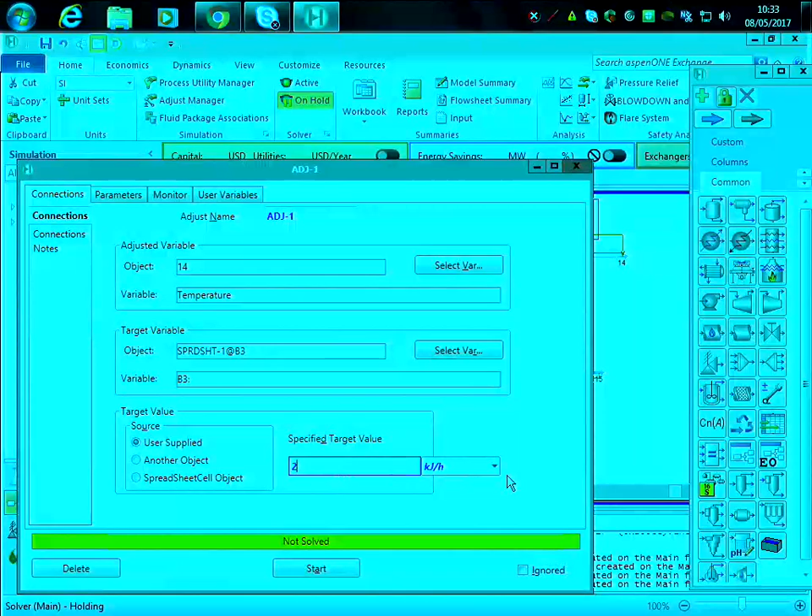And then I click on... so which feed is it? Which, 14, right? So we click 14 and we're going to adjust the temperature by changing spreadsheet B3. Specify 2 points. 2.82 exponential to the 6, and then parameters 1000. Okay.

Spreadsheet. I think that is Q what we need to specify. That was, yes. Perhaps that's the issue, because Q is the heat flux. Shouldn't matter, but...

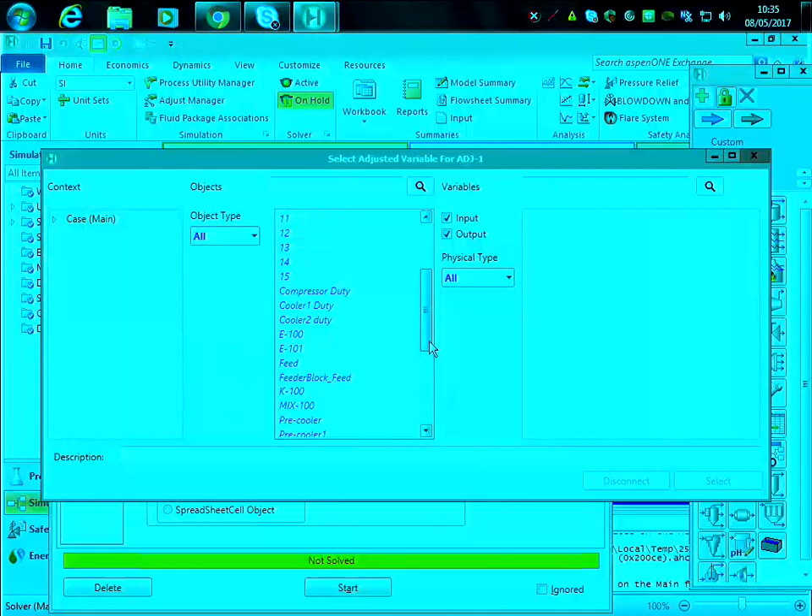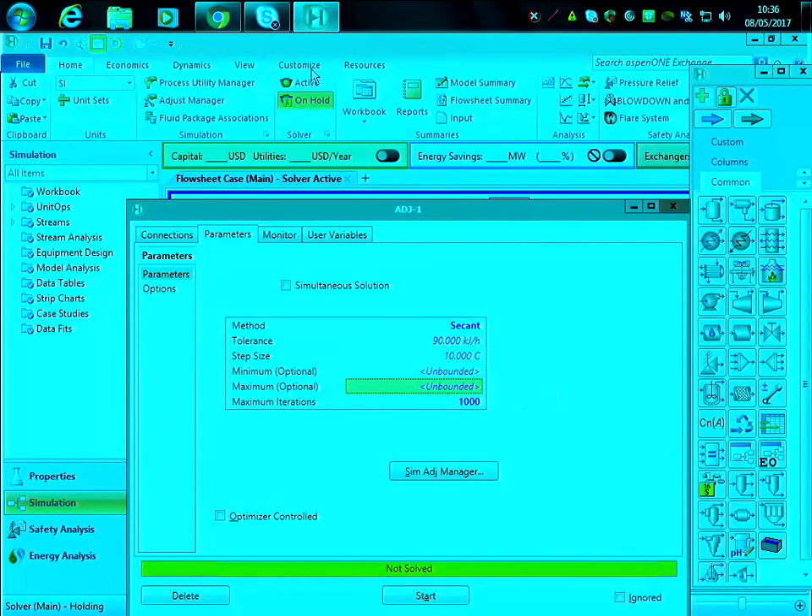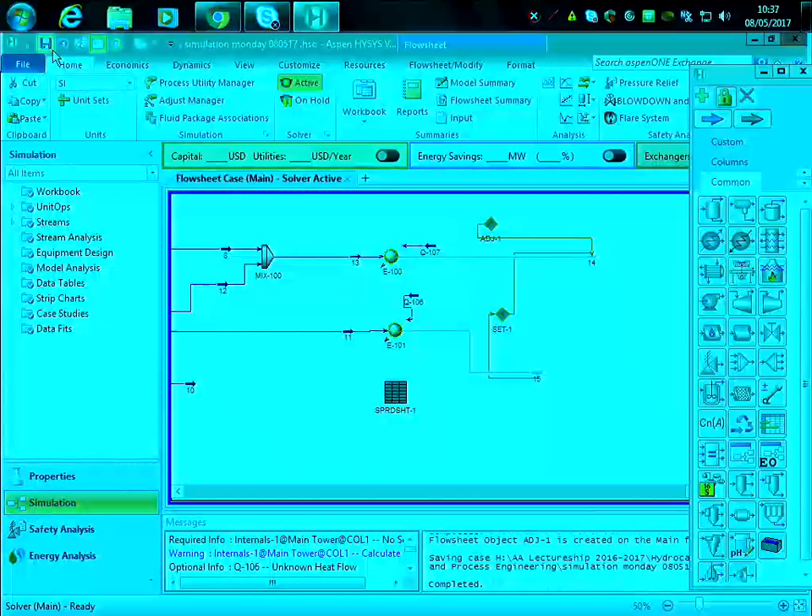Or no maximum. No, it goes to no maximum. Yes? You've got to put like a min and a max in. No, you don't need to actually for this. Start value. I think that it's a little bit sensible actually. Let's submit. I'm giving you the solution, you just need to replicate it. It takes a lot of time, just the calculations. So that's it. Basically, you click on adjust.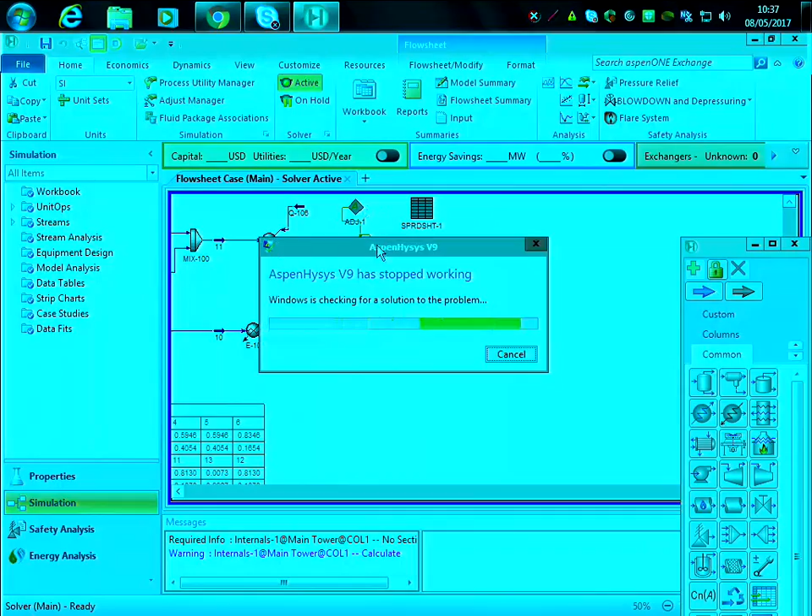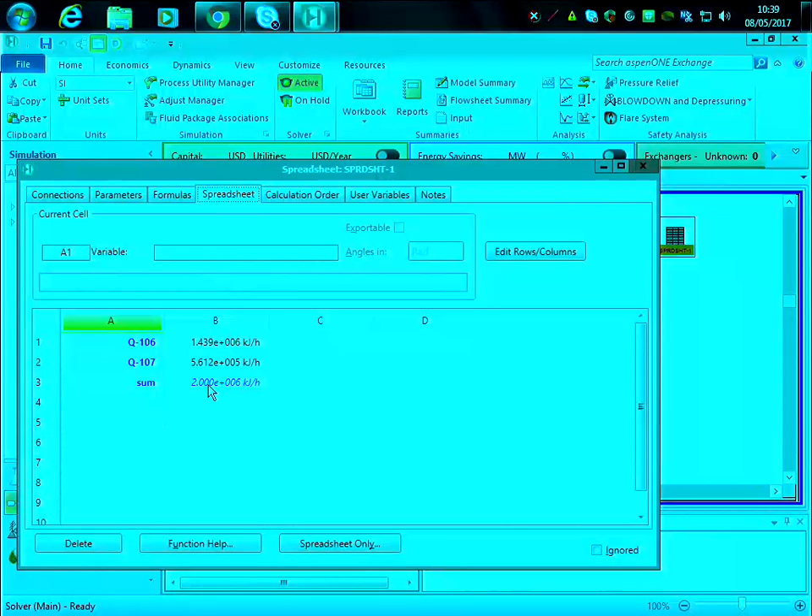Right? So once you set that, you have the spreadsheet here. So basically Q-106, Q-107 heat flux. And then we have the sum of the two of them here. We click on adjust, change 12 by changing the temperature. The target variable is the spreadsheet and B3.

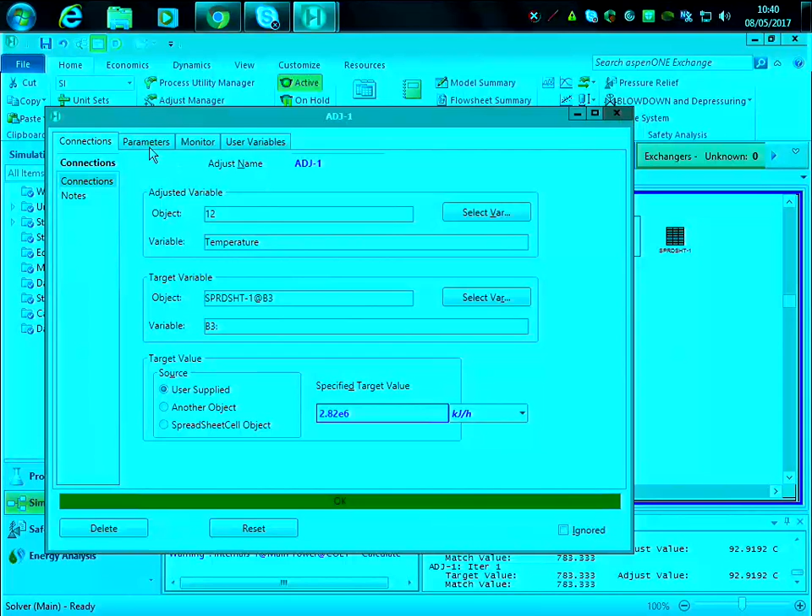And here, well, that's not completely correct, but specify that. 1, 2 you said, or? Okay. So you specify the number of iterations 10,000. Perhaps it was too low, the number of iterations. And then that's it.

So let's have a look at it. Composition ethane 0.80, 0.2. Composition of this one 0.992, 0.007. So is that all right with the composition that was called in the assignment? In the assignment it said that the ethane should be 0.75, right? And we're actually having it a little bit higher, 0.80. So what does that mean? That we're separating more than actually what we needed.

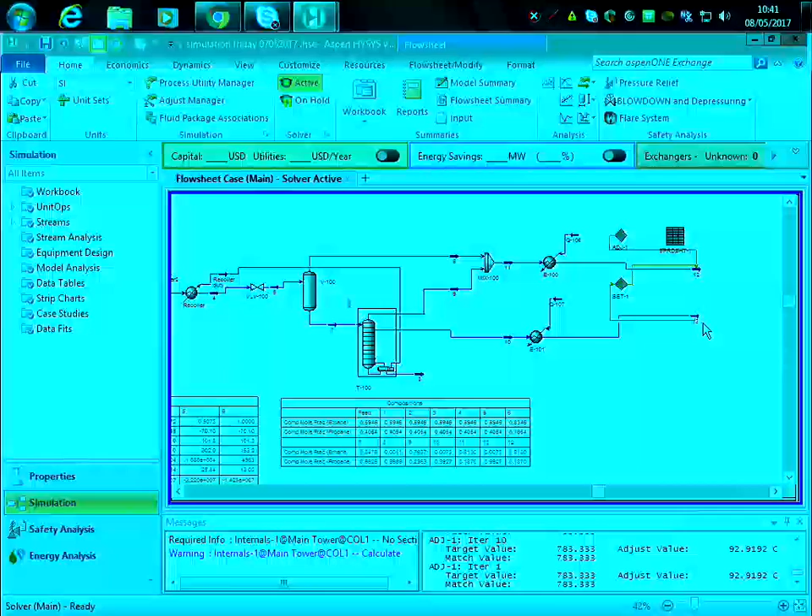So basically, what could we do? Reduce the number of plates, perhaps, right? Who knows? Perhaps having 4 will hit 0.75 better, or perhaps not. So you'll need to try it. So we need to adjust the number of plates again? Yes. Reduce the number of plates. Let's say if I change this to 4. And then no, it hasn't achieved the separation. Can you change the number of plates?

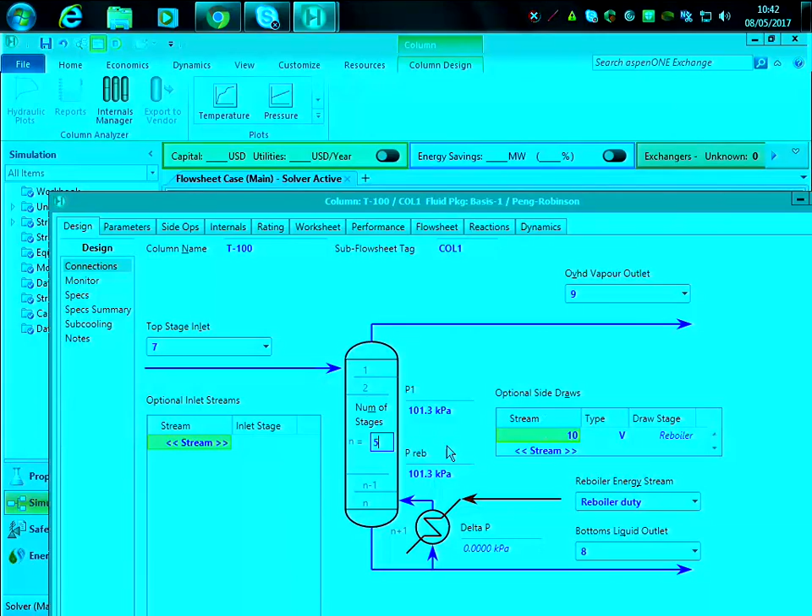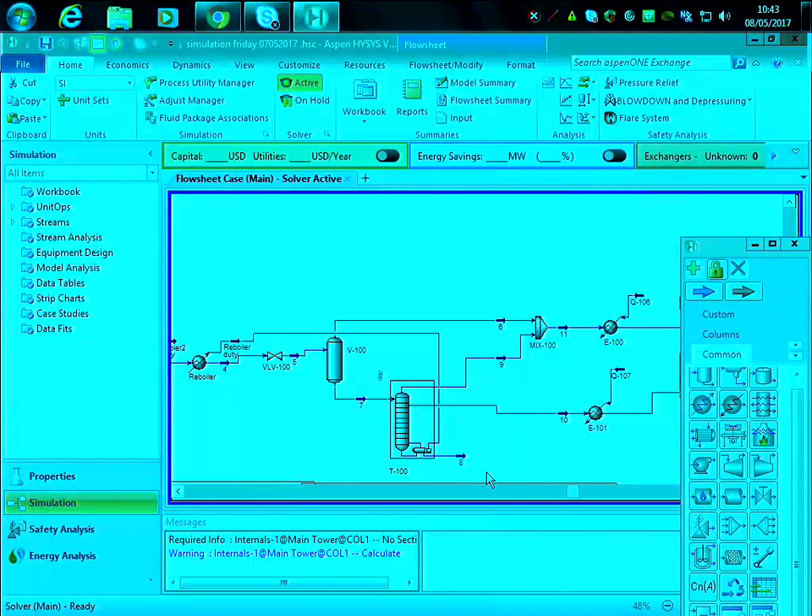When something like that happens, you close down and then you open the same file again. I don't think that you can change the number of plates manually. It's not as straightforward because we have an adjust tool, so you'll need to delete that, change the number of plates and run everything again. But if you achieve that with the 5, don't try to optimize. There's no reason to optimize. If you do a good comparison between one and the other, that should be enough.

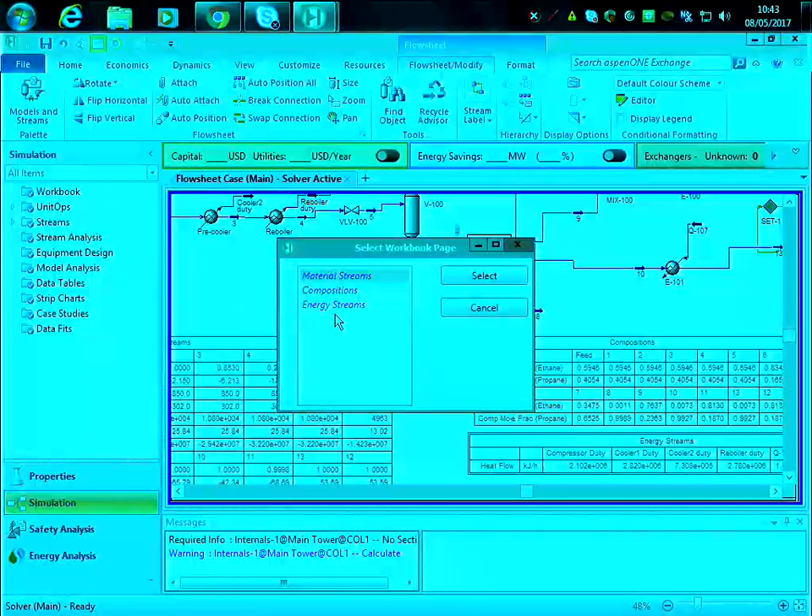Now, another thing: how do you check the final and get these plots in here? So I got these charts. Yes. Where did you get this chart? Yeah, so you go to Customize, Flowsheet/Modify, and you add a stream label. Oh no, it's not stream label. You click here, workbook table, and select what you want: the materials, composition, or energy streams. And it will immediately show you the table. So this is the material stream.

Let's say if I delete all of those, I go into here, select material streams and I get all the material streams. With that I can see how the mass flow is changing throughout the whole system. If I want to know how the composition is changing, I click on composition and I get the table for compositions. Okay. So here I have in stream 13, 0.992, and 12, 0.80, 0.2.